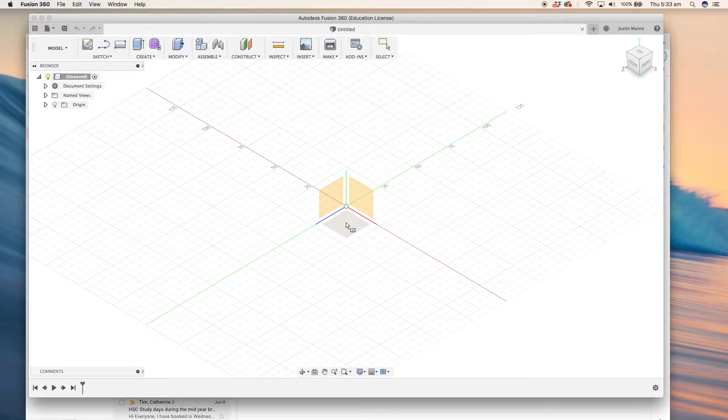So the first thing I need to do is actually create a sketch. So we're just going to create a sketch. We can click on this part here, and the sketch you want to create to start with is a rectangle, and I'm just going to create a center point rectangle. It'll give me an origin here, and I can choose the planes in which I want to start my sketch on. I'm just going to start on the bottom or the base plane, and I'm going to create a center point rectangle from my center origin coming out.

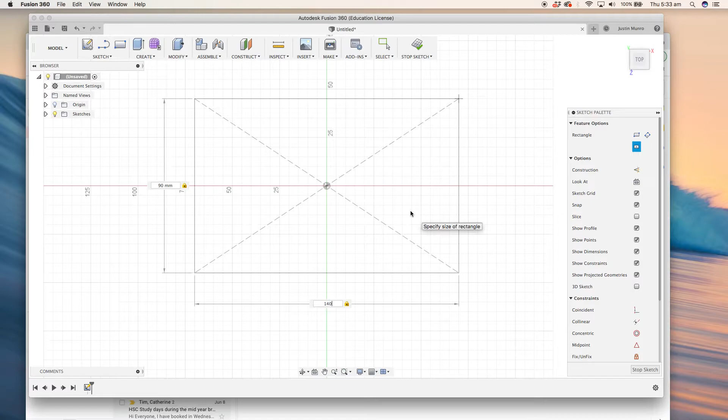I want it to be 140mm in length. Oh, sorry, I'll take that back. I want it to be 90mm in width and 140mm in length. Most timbers come in about 90mm width, so that's a pretty standard size block of timber if you were using radiata pine or something like that.

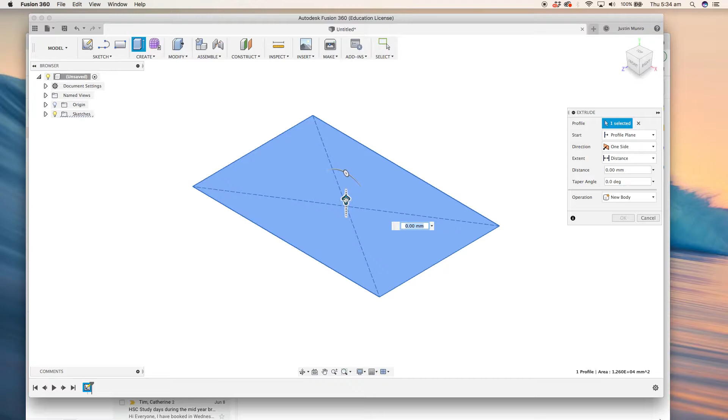The next thing I'm going to do is press E, which will bring up the extrude toolbar, and I'm clicking on the surface that I wish to extrude, and I'm going to pull that up 70mm, and I can just type that in. That's two thicknesses of 35mm timber basically. Pressing enter, you can see now I've got a solid block of timber.

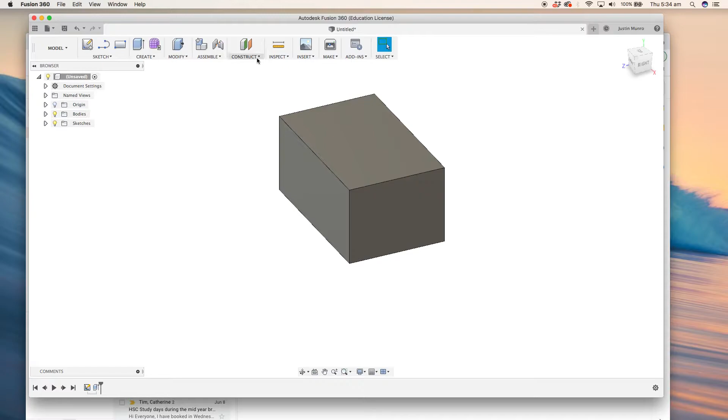The next thing we want to do is create a few planes through our timber, through our block. So we're just going to hit construct, and we're going to create a mid plane to start with. And I essentially want to create a mid plane between this front surface and this back surface. So clicking on the two surfaces, I can see I'll get a mid plane. I press OK, and there's my mid plane drawn on the surface there.

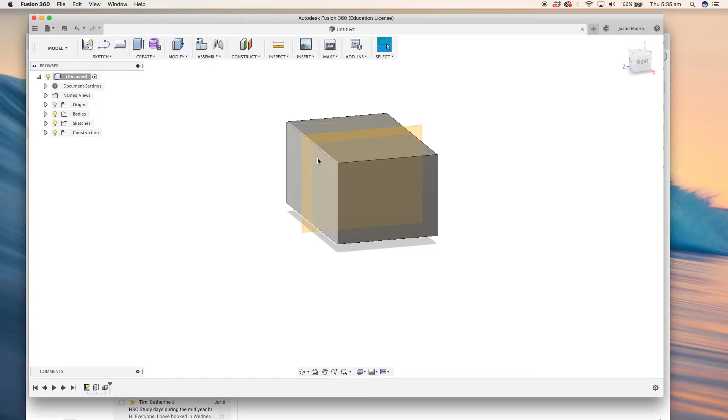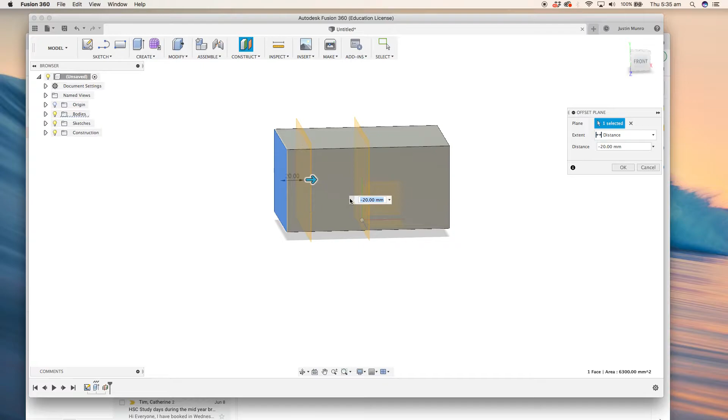The next thing I want to do is construct an offset plane. I'm just going to go here to the offset plane menu, and I'm going to select the surface that I want to offset, and in this case it's going to be this back panel here. You can click on the arrow and see whether you'll get a negative number or a positive number here. In this case I get a negative number. I'm just going to offset that 20mm, and again pressing OK.

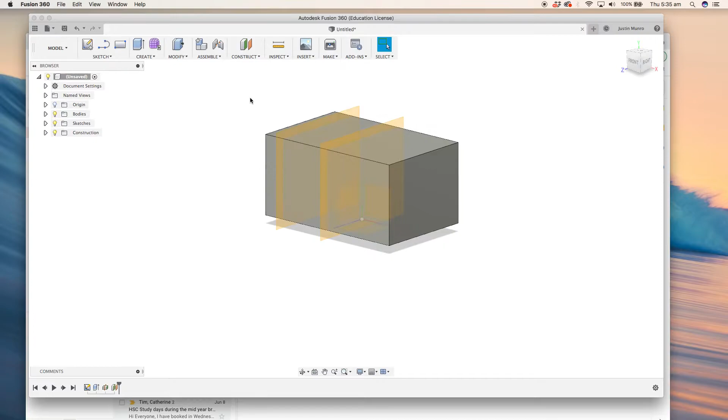What we want to do now is essentially make a circular channel through our piece of timber. Before we do that, we might just make one more plane to make it a bit easier on us, and create another mid plane through this surface and the bottom surface, and that'll give us all these different planes through our timber, which will aid us in our design as we go.

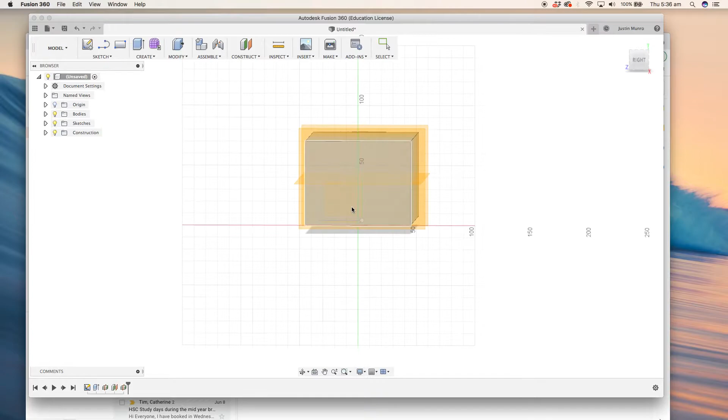Okay, so we're going to create a sketch again. This time we're going to create an ellipse sketch. And if I select this front surface, I can find the center of my block of timber. I can find the center quite easily because I've got that mid plane running through it. And if I drag out to where I wish the end of my ellipse to be, I can start to create the shape in which I want my circle to be at the front of my echo amplifier.

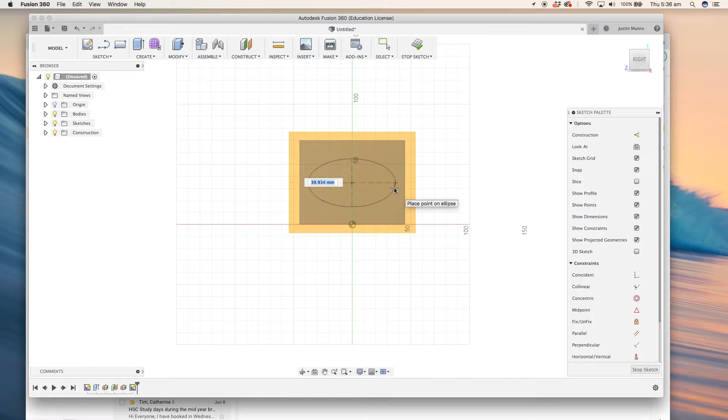Placing that there, I'm now going to go back and create another ellipse, or create another sketch. So I'm going to stop that sketch now.

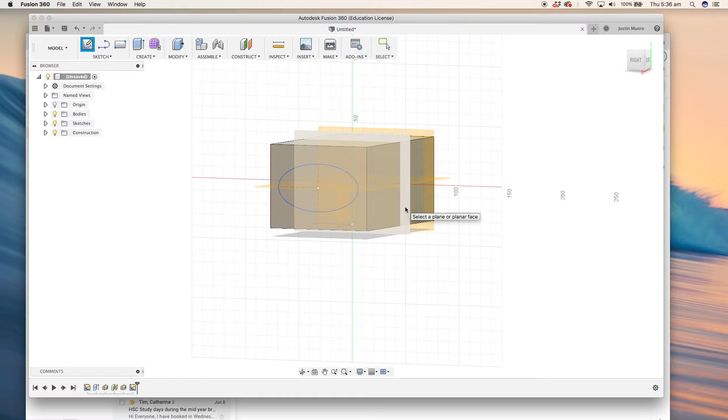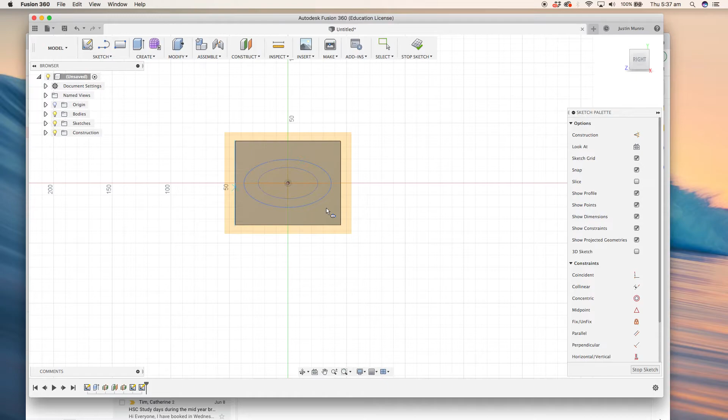I'm going to create another sketch. This time I'm going to create a sketch on that second offset plane, and I'm going to use the ellipse tool again, and I'm just going to bring it out. This time I'm going to make it a little bit smaller, and you can use your best judgment on the size that you want this to be, but I'm going to make it a little bit smaller than the first ellipse that I made. So essentially I'm going to have a sketch drawn there through the center of my block.

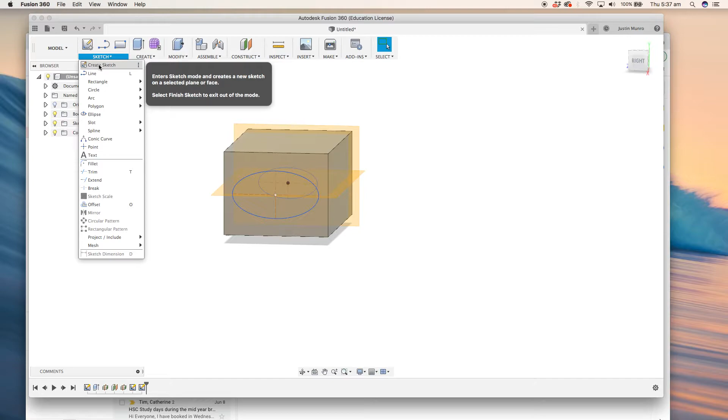The next thing I'm going to do is create another sketch. I'll finish that one, so stop sketch. I'm going to create another sketch on this back offset plane. And this time, what I'm going to do is I'm going to start to analyze the size of my phone. Now my phone, if I measure it quickly, and everyone's phone might be a little bit different, so you'll need to think about the size of your phone. Mine is 75 millimeters.

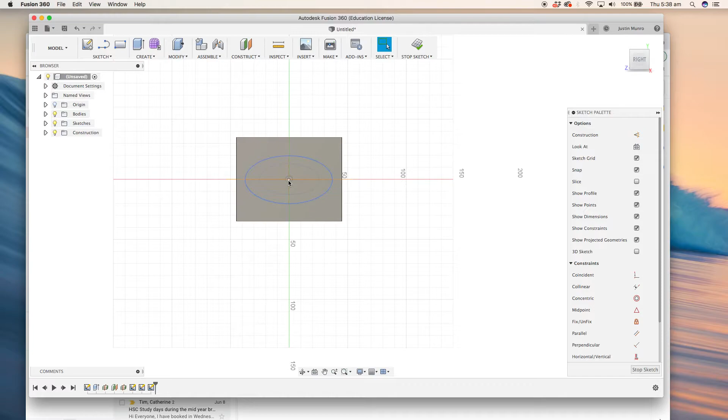So what I'm going to do here is I'm going to create a sketch, and I'm just going to use the line tool, and then I'm going to make a construction line, and I'm basically just going to draw a construction line from point to point, making sure it's at 90 degrees, and I'm going to draw another construction line over this side at 90 degrees, if I can get there.

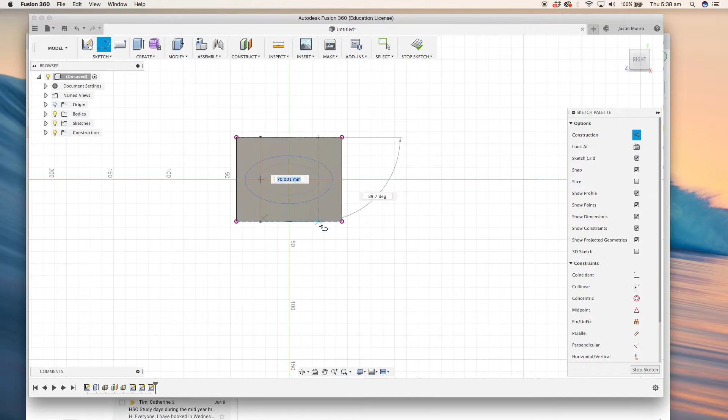And then I'm just going to dimension this to these lines. So clicking D, I can get a dimension tool, and I can actually start to select this point here and this line here, and I can bring up a dimension on how far I want that construction line to be in. So if I've got a block that's 90 millimeters and I'm taking 75 millimeters off for the thickness of my phone, that leaves me 15 millimeters left. So I need about 15, and then I want to halve that for each side.

So if I click here and place my measurement, okay, so I've got 15 millimeters. So if I halve 15 millimeters, I've got 7.5. So I essentially need 7.5 millimeters left on each side of my block so that my phone will sit in nicely. So I've dimensioned that at 7.5. I'm just going to dimension this side also at 7.5 millimeters. So you really need to know the size of your phone, and you need to know the size of the timbers in which you are working.

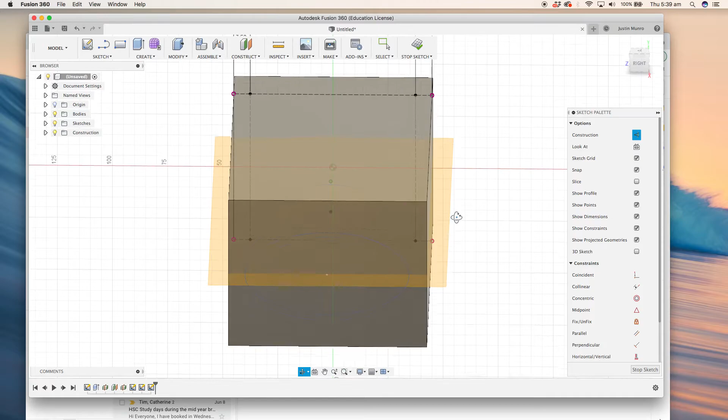Okay, now if I look, so that's where my phone needs to sit. I need to come in 7.5 millimeters from each side if I wish to have my phone sat in the center. The next thing you need to know is the dimension in which your speaker is. Now my speaker is in two places in the center of my phone, and it takes up an area of about 50 millimeters.

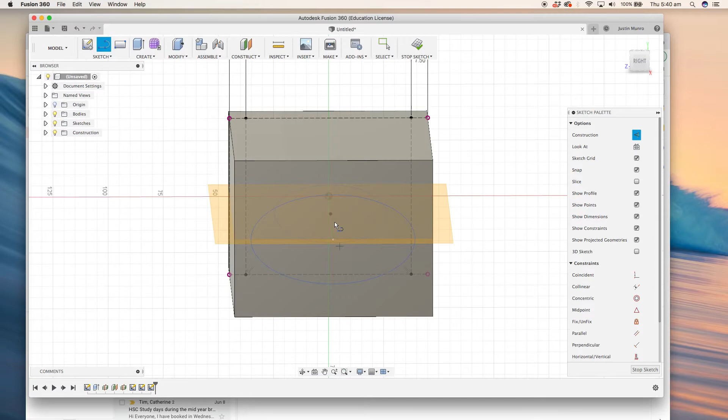So again, I'm just going to create a construction line, and if I press L for line, I can shortcut this. And I'm still in my sketch, so I can create another construction line down here. Key thing is that you're getting them at 90 degrees, otherwise you'll have an issue dimensioning them because they won't be parallel. So I'm just drawing them anywhere for now. And then I'm going to press D for dimension. And I want to come in 50 millimeters, so that's 40 millimeters short of my 90 mil measurement. So I'm just going to come out here and make this side 20, which is half of 40. And this side out here, 20, which is half of 40. Okay, and I can see my construction lines there.

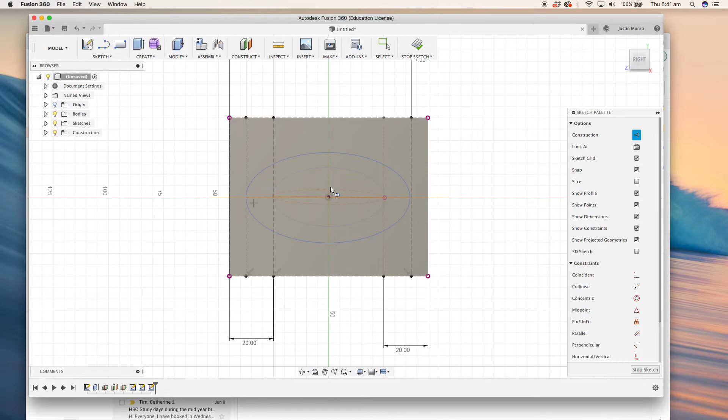So what I want to do now is create another ellipse. From my center point, and I need to come out to those construction lines. And I'm going to make this one really skinny because I want my speaker to get bigger, smaller as it goes towards the back. So if I scroll around here now, you can see I've got a small ellipse in here, and an ellipse, a bigger one, and then a larger one at the front.

If I stop that sketch now, and I turn off my bodies, okay, here are my ellipses through the center here. This one's done with the construction line. So I might just go back in here and edit this last sketch.

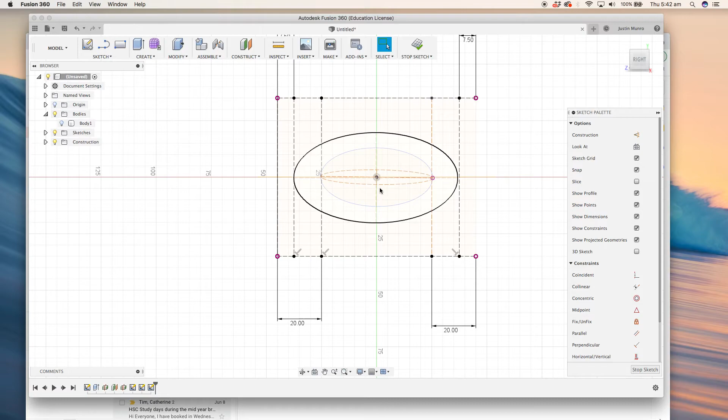I forgot to turn the construction line off. If I select that ellipse tool, I can take the construction line over on the side off, stop sketch, and now you'll see that it's a solid sketch, not a construction line sketch.

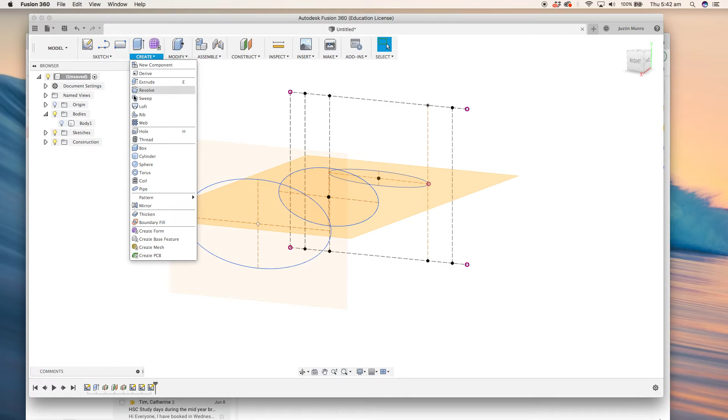Okay, we're now going to create a loft, so we go to create and hit the loft tool. From here we can basically select our, let me just cancel that. We're going to create a loft tool, and we can basically now select our 3 sketches. We can turn our body back on, and we can see here that we are going to cut. So it's going to cut between these 3 points.

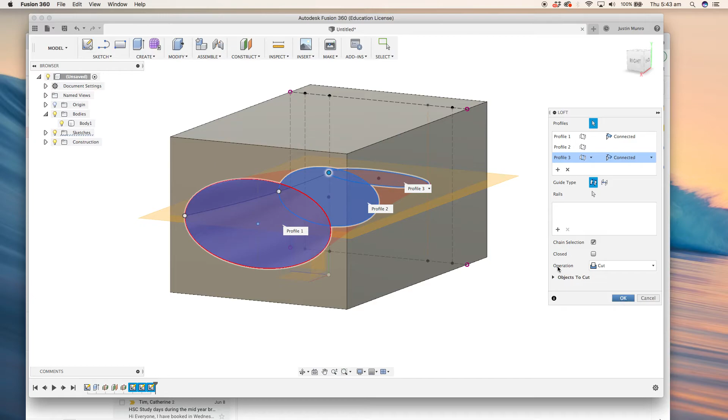Clicking OK, it's going to cut like a parabolic shape through our eco amplifier to get that projection of sound from our phone. That's sensational. What we're going to do now is we're going to turn off this. We might cut our body first, split our body. So we need to see this as 2 separate pieces of timber. Currently it's just 1 piece of timber.

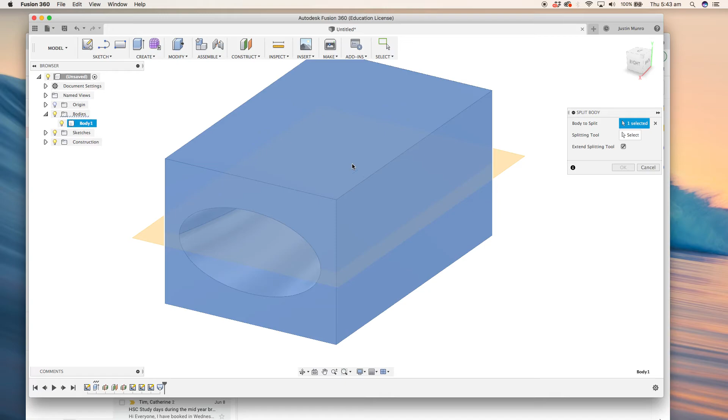So what we can do here is we can go to modify, and we can come down to split body, which will open up this toolbar on the side. And you can see here we've got body to split. The body we want to split is our eco amplifier, and then we can choose a tool that we wish to split that. In this case, it's going to be the mid plane that we created. So if I click on that mid plane, press OK, you can now see that I have 2 bodies off to the side, and I can turn one on and one off. So now we've got 2 bodies.

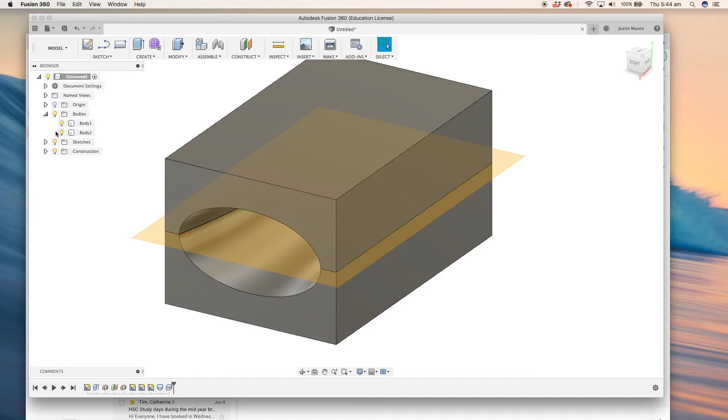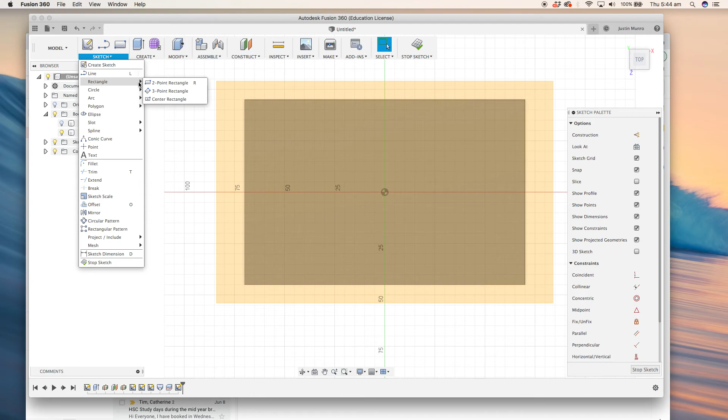What we might do is turn the second body off, so we just have the top, because now we need to create a slot for our phone to go into. So essentially what we wish to do now is create a sketch on this surface, which is cool. I like to put in a couple of construction lines to get me started. Or let's just go straight with a rectangle. So if I just get a center point rectangle again, and I can draw that center point rectangle anywhere, it doesn't matter my sizes at this point in time. So I'm just drawing a rectangle, and by pressing dimension now I can start to dimension that sketch.

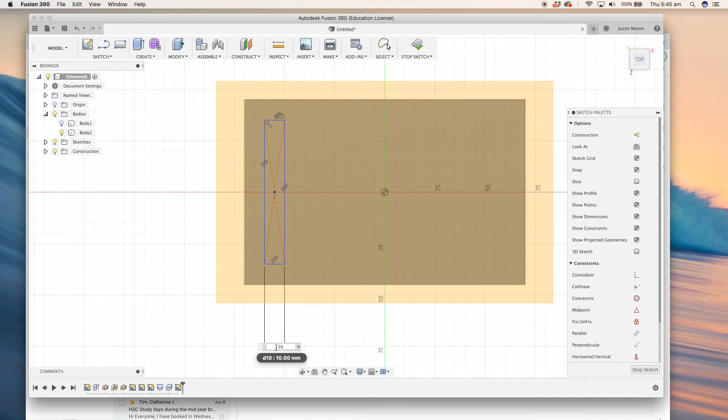So I know by measuring my phone that the thickness of my phone has to be 20 millimeters, which allows a bit of play for my phone to fit into the slot. And then I need to dimension it by length. So still on the dimension tool. And I need my phone width to be 75 millimeters. Okay, and you'll notice that my rectangle that I've made is blue. Okay, so what that means is it's not constrained in my sketch.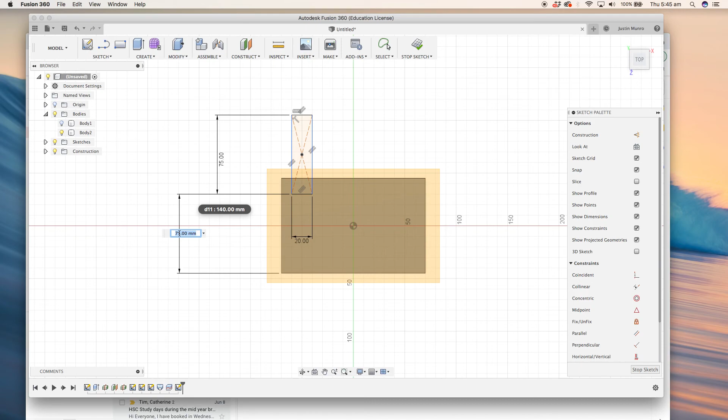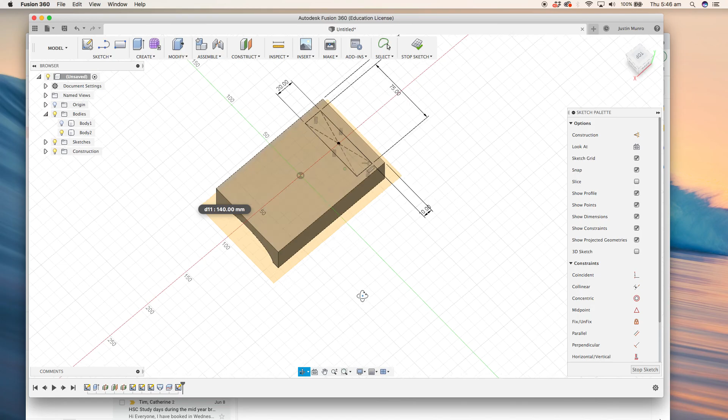So I'm still on that dimension tool, but I just want to dimension now this line to this line, and I need that to be 75 millimeters to be in the center of my block of timber. Okay, and I need this one here to be off that back wall 10 millimeters, which it already is, in order to pick up the channel that's running through underneath for my speaker. You could actually come a little bit further forward if you wanted to, but the halfway of my speaker's there. It's almost sort of to the front of my phone, so that'll work in quite beautifully.

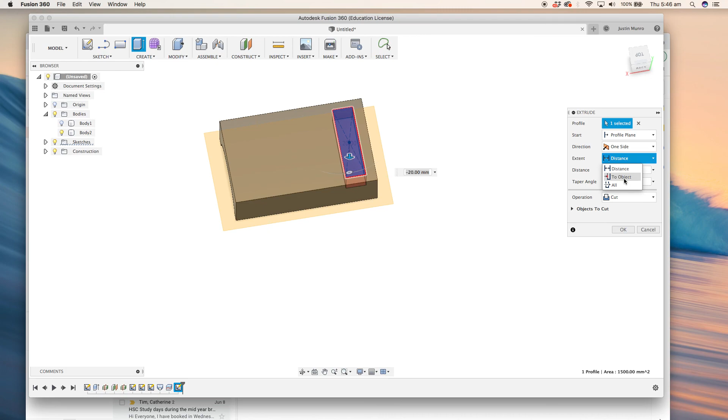What I need to do now is press E for extrude. I can select the shape that I wish to extrude. I can start to push that away, and you can see I'm on the cut operation off to the side. The extent or the distance I wish to travel through is the entire block of timber. Pressing OK, I now have a notch through my timber which my phone can sit in, which will pick up sound. I can turn my second body on now, and there's my eco amplifier essentially made ready for CNC machining or milling.